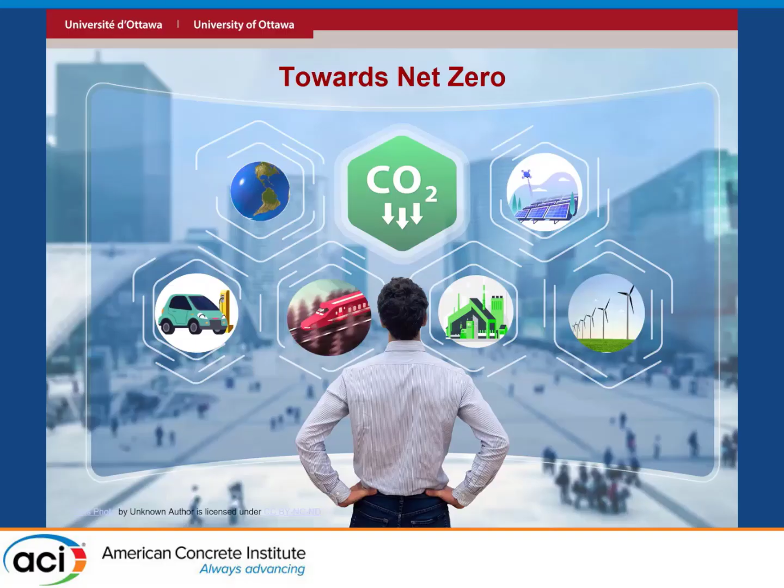So we're going to talk about ASR indeed, but towards the end of the presentation. I think this introduction part is very important, that everybody knows we need to decrease carbon footprint, and we have several different ways of trying to do that. One of the ways is definitely using recycled concrete aggregates.

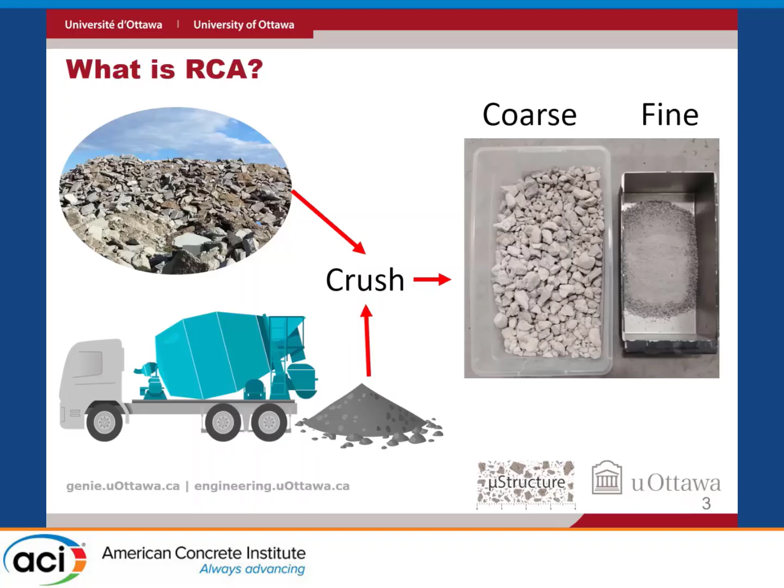So I think whenever we talk about recycled concrete aggregates, we need to be a little bit more thorough and mention whether we are using construction demolition waste or returned concrete. There are completely different types of materials that may be generated out of those. So if we do not distinguish those, it's very difficult to make averages and compare apples to pineapples.

So in Canada, we can use that for structural purposes and for exposed members. There is an annex O, which tells that we need to pay attention on durability features, on the workability and so on.

But based on my past experience and other colleagues doing research in the team, I would say that we have basically two problems with RCA nowadays. First is fresh state—normally mixtures could be super dry, difficult to place, the rheology is not great, and so on. Secondly, and most importantly, is the durability long-term behavior. We are still not sure how that material will perform in the field over the years.

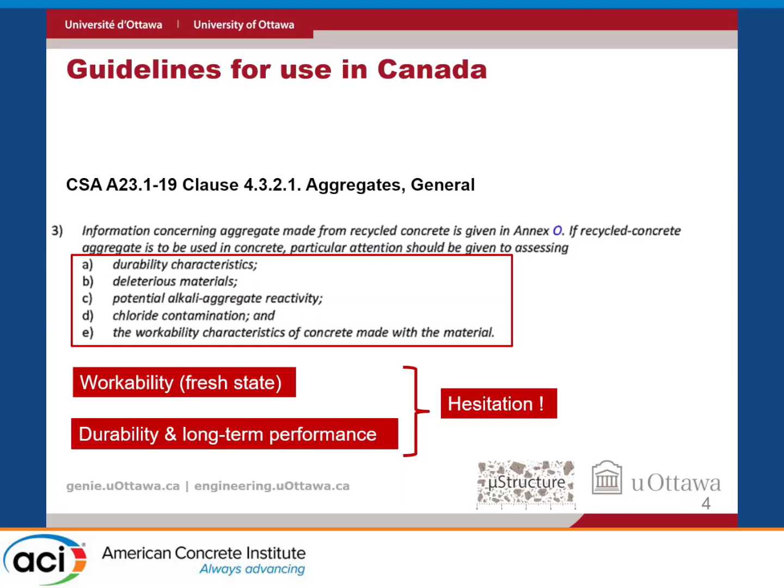Strength is important, as civil engineers we all need, but we can somehow control, especially for conventional strengths. In that perspective, trying to connect that to the presentations that were done before—if you crush a particle, your particle is going to be somewhat like this.

So recycled concrete aggregates are not at all whatsoever like original virgin aggregate. If you want to get the same or similar performance of your recycled concrete aggregate mixture, we need to account for those differences, because otherwise you're going to lose performance.

Of course, this value is very significant. If you have ever tested the residual mortar content value, it may range from 20% to 60% of your particle. So it could be more than half of your particle just mortar. So we're going to have higher porosity, lower specific gravity, higher absorption, and so on.

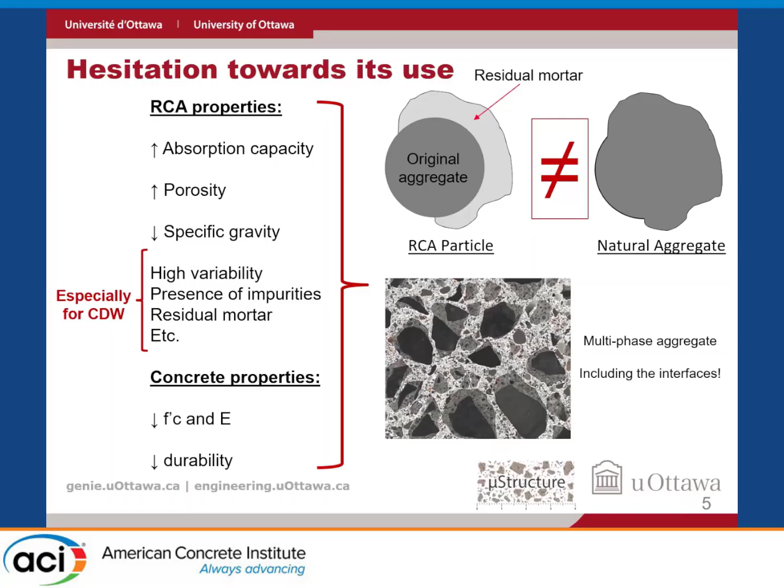So of course, what you're going to do is decrease your compressive strength, your stiffness in general, and your durability. And then what you're going to do is put more cement, trying to come up with all of the things, and then you're going to conclude that it's not really sustainable. Why? Because the mix proportion is not there.

So if you look at the particles, we have cast some concrete with white cement just to really highlight how a particle looks after being completely crushed. And you're going to see that this is very different from the other one.

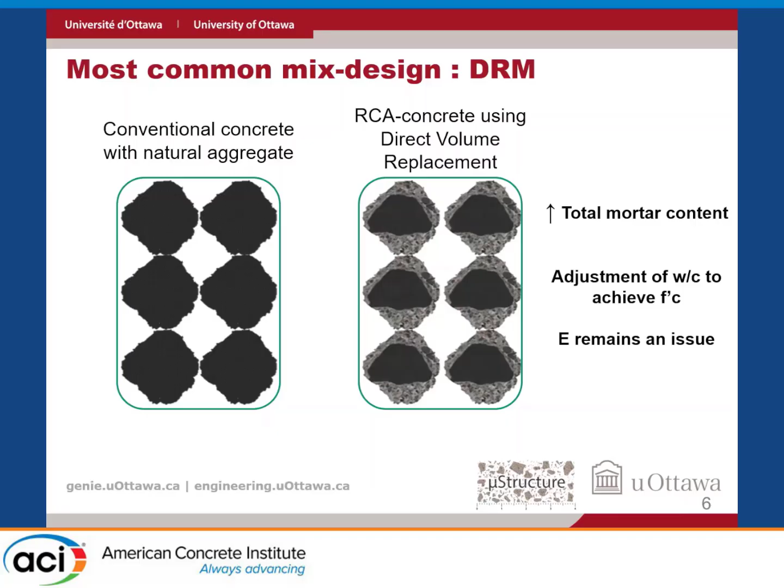So whenever we do proportioning of natural aggregates, you cannot proportion the same way if you're dealing with limestone versus granite versus basalt. All of these features need to get into the mix proportioning. This is the same thing for the RCA.

And this is not new. In the early 2000s, there have been lots of methods developed to try to account for the amount of old mortar in the system.

So if you have a conventional concrete, you would have water, cement, sand, and coarse aggregate. But if you want your recycled mixtures to match the performance of this guy, you need to account for that volumetrically. So two methods of mix proportioning were created in the early 2000s to tackle that.

The first is the equivalent volume method, in which the concept is you match cement paste and you match aggregates. The second one is called EMV, equivalent mortar volume method, in which basically what you do is match the mortar and the coarse aggregates.

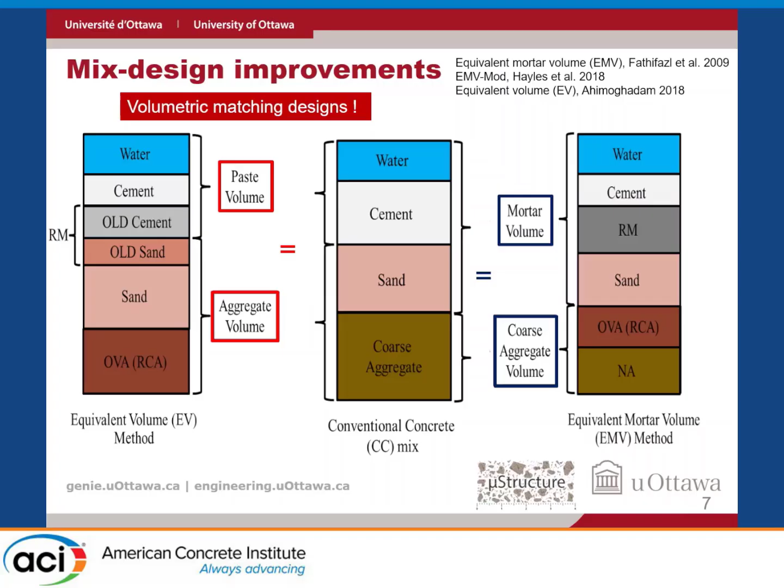And even more recently, people are using particle packing models. So you're going to pack in such a way that your aggregate interlock improves. And aggregate interlocking improvement means improving performance.

And then, of course, since you're measuring the residual mortar content you have in your particles, what you can do is remove cement and replace it with fillers—for instance, limestone fillers or fillers of other kind. And then you keep the amount of cement very low.

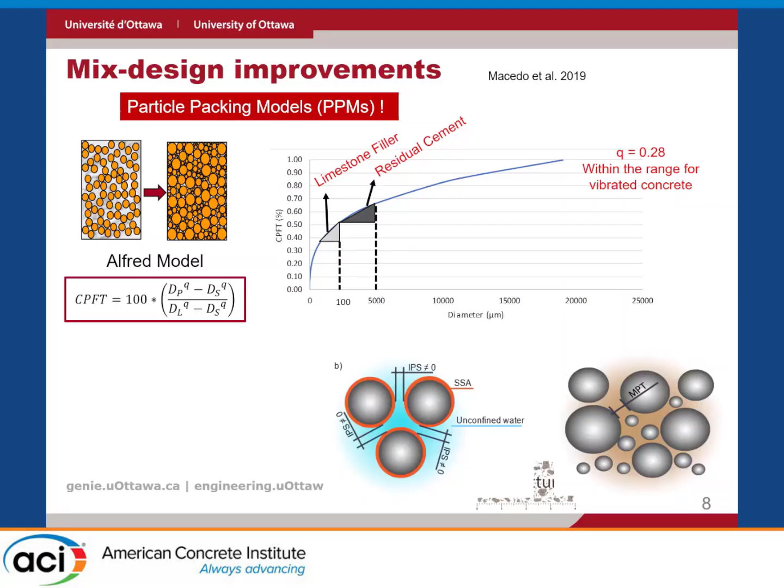And of course, if you are more interested in proportioning techniques, then you can start measuring the distance between the particles so that you ensure you have rheology, which is one of the big problems of the use of RCA.

So this is a published paper that I got with one of my students.

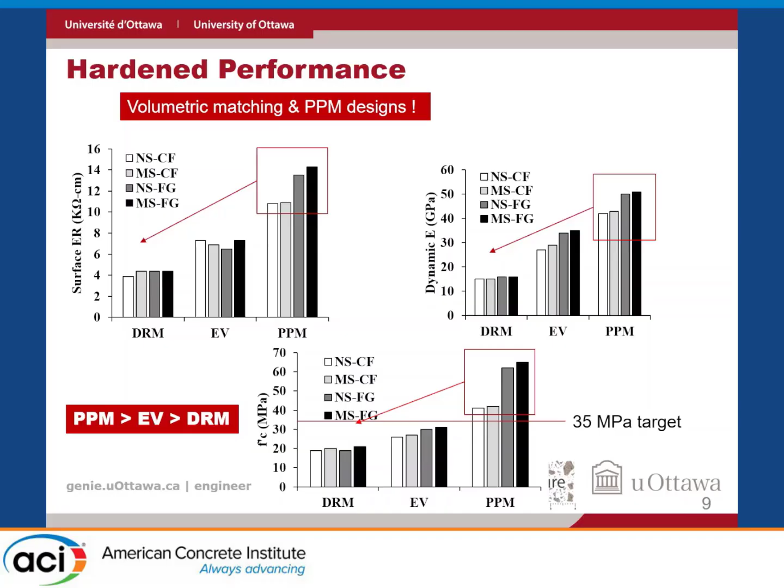So far, people were using the so-called direct replacement method. For electrical resistivity, if you do a particle packing model versus an equivalent volume, for instance, a matching volume versus a direct replacement, you see how you lose performance if you simply take your aggregate and use it as is. Same thing for compressive strength, if you do particle packing compared to matching volumetrically or direct replacement. So definitely, getting your particle recycled aggregate and using it as is is not the way to go.

This is another project I developed with another student in which we have RCA, very deteriorated, with limestone and so on. You can see that with a good proportion we may achieve 60 megapascal with a particle packing model. So again, this can be done. But if you go for direct replacement, you're going to have a huge decrease of strength.

So yes, the quality of the aggregate is very important, but for RCA it's even more complicated, because it's not only the quality of your original virgin aggregate, but actually the coupling of the quality of that original virgin aggregate with the quality of the cement paste attached to it, when compared to the new cement paste you are adding.

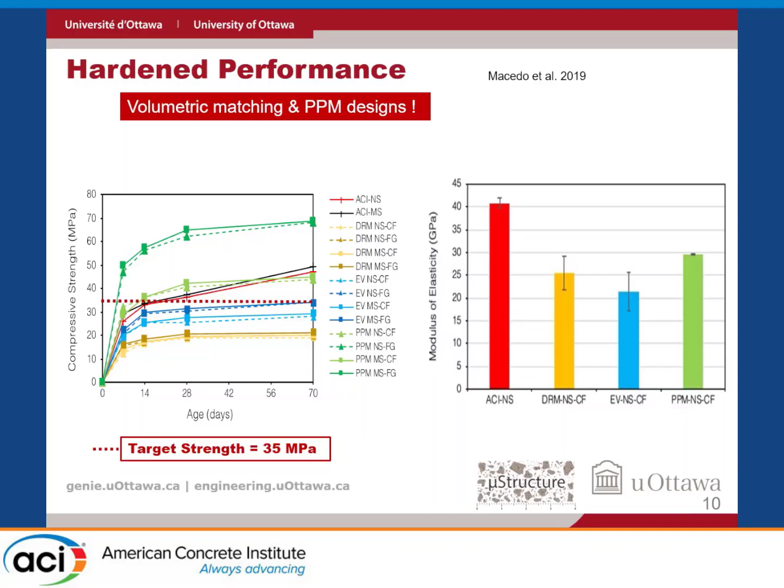Stiffness is also a possibility to keep very good if you account for the residual mortar. So we decided, okay, strength-wise it looks like it works, let's try some durability studies to see whether this concrete could be of interest.

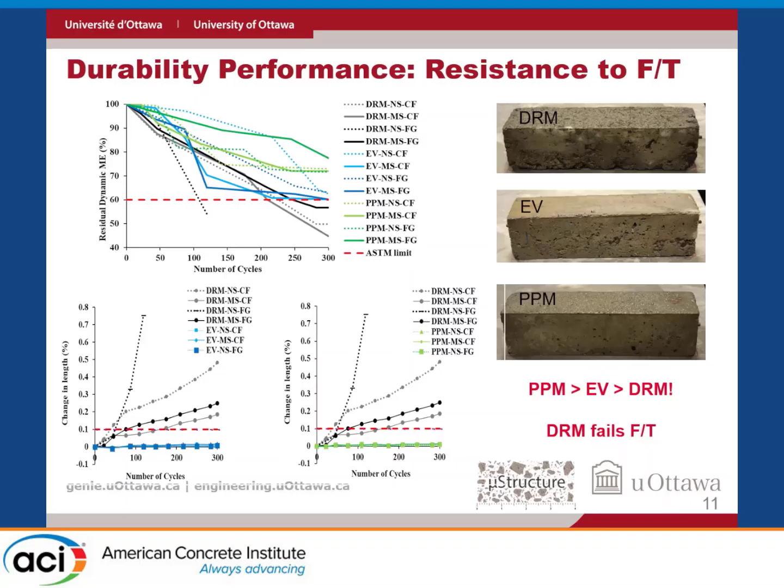But if you proportion it properly, the same concrete with that same aggregate, just taking into account a better proportioning, you can get a good concrete. So the message here is, at some point we need to stop blaming the aggregate we receive. We have an aggregate, yes it's recycled, it presents more cracks, some initial features, yes. But as engineers, we can proportion it properly to make the concrete present good performance.

Now, to cover the topic of my title, I'd like to talk about the coupling of recycled concrete aggregate and the possibility of developing further alkali-silica reaction. As everybody knows, alkali-silica reaction, or alkali-aggregate reaction, is a very important durability-related topic in Canada, the US, and worldwide.

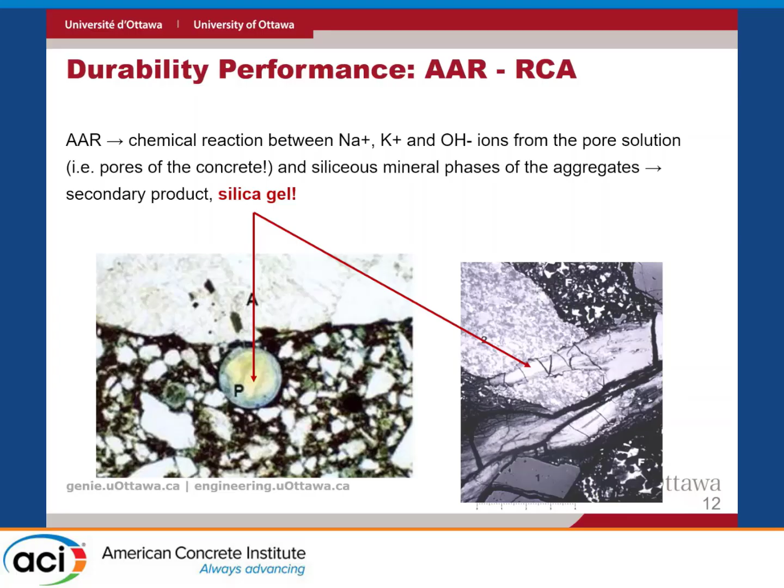Every four years we have a very important conference, which was hosted by us in Ottawa last May. We know that the unstable mineral phases of the aggregates we use, with the cement, develop a gel. The gel itself is not a big issue. The problem is that whenever that gel uptakes water, it induces swelling and deterioration.

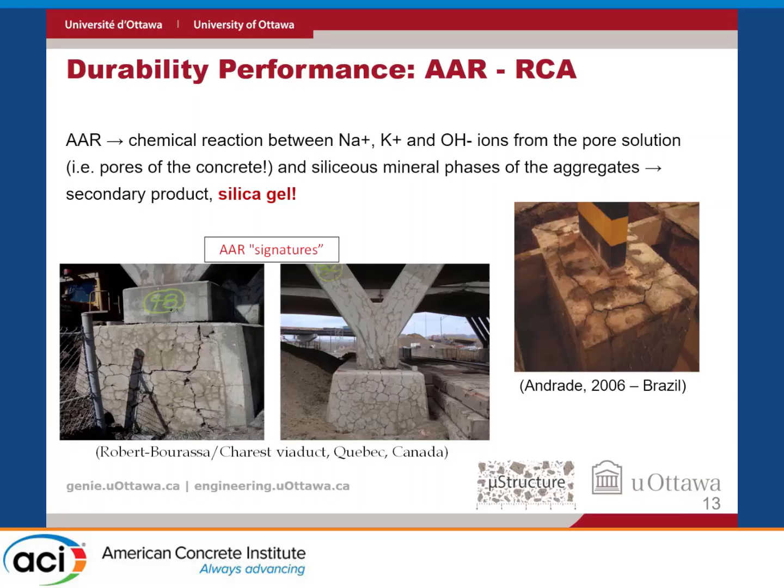So these are some photos of infrastructure in Canada and in Brazil as well, affected by alkali-aggregate reaction. So the question we may have is: what is the durability performance regarding AAR from the perspective of a recycled concrete aggregate?

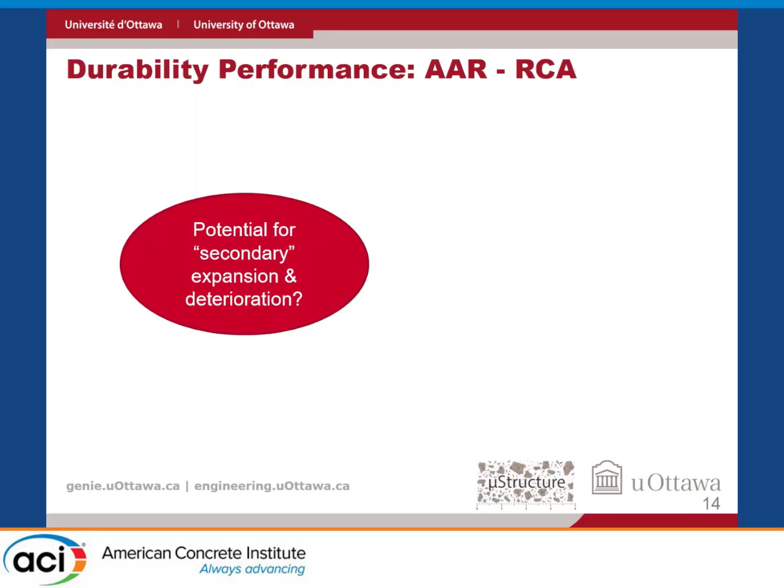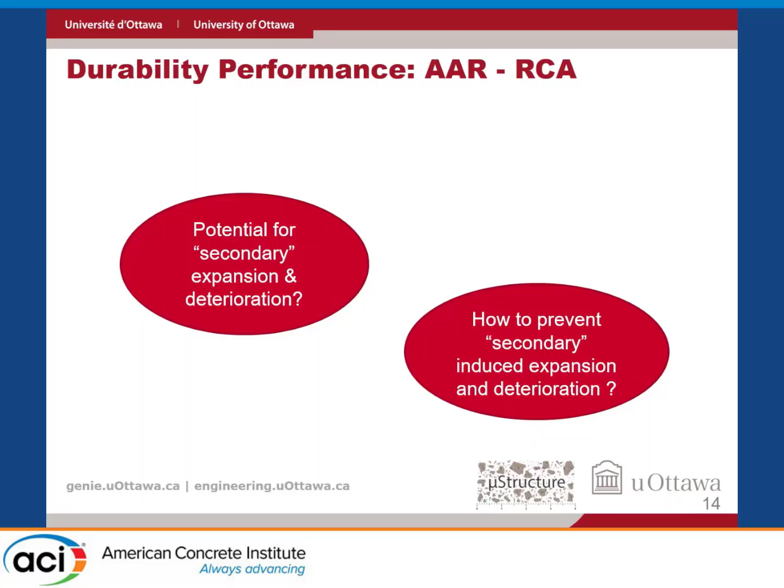Is there any potential for secondary induced expansion, meaning you have a structure that's swollen for many years, now you demolish it, crush it, and reuse it again - what about the deterioration? If it happens to swell again, is the deterioration going to be similar or not? And if there is a possibility of secondary deterioration and expansion, how do we prevent it?

I'll show a couple of results from our past research. This is an overpass called Robert Bourassa Charest in Quebec City, that was demolished after 60 years in service, bearing lots of alkali-aggregate reaction. The amount of expansion was already above and beyond what we would have expected from testing that aggregate in the laboratory.

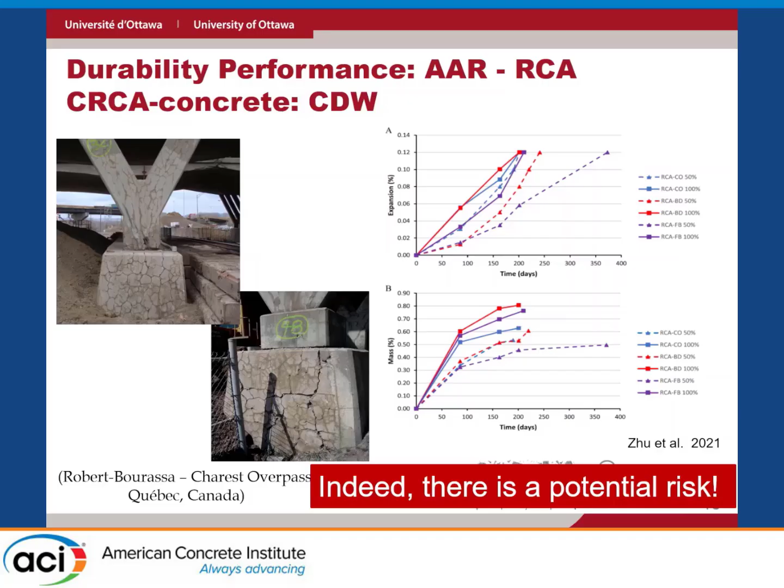Nevertheless, we crushed it and decided to cast some concrete specimens out of it, and we kept having very important expansion. So yes, it looks like there is indeed a very important risk of reusing aggregate as recycled concrete aggregate bearing alkali-aggregate reactive minerals. We need to take this into account whenever we make new concrete - it's not because it has deteriorated a lot that it doesn't have the potential to keep on going.

After those results, I decided to do a more systematic study with other students in which we try to generate what we call returned concrete in the lab and construction demolition waste. What does that mean? It means we get two aggregates that are very reactive: one coarse aggregate from Canada and one sand that is very reactive from the region of Texas here in the US.

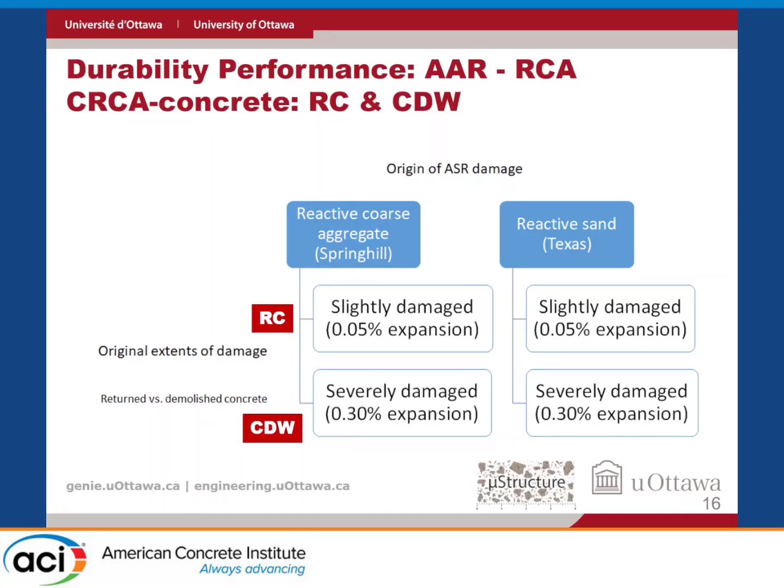Then we slightly deteriorated concrete, which would simulate in quotes a returned concrete, so 0.05% expansion, just slightly cracking. But we also tried to provoke what we would call potentially a construction demolition waste, so we allowed those concrete specimens to swell up to 0.3% expansion, where you can see cracks and even break the concrete if you hit it hard. So it's a very heavy degree of expansion due to AAR.

Basically, the first curve at the top for both plots shows the aggregates in a new concrete. How does that aggregate swell if put in new concrete? You see lots of expansion, 0.3%, even more here, so very extremely reactive aggregates. But if you tackle it, breaking it whenever the initial concrete reached 0.05% expansion or even 0.30%, they both continue swelling.

More or less the same kinetics for the recycled aggregates, slightly different towards the end, but it delays the process using a recycled concrete aggregate with potential for ASR. It delays the process, but indeed we have a problem here.

Same thing for the sand. If we use a sand with already slight reactivity or very high reactivity in concrete, the secondary expansion would be very important. Yes, a little bit delayed over time, but indeed there is a potential risk and we need to account for that.

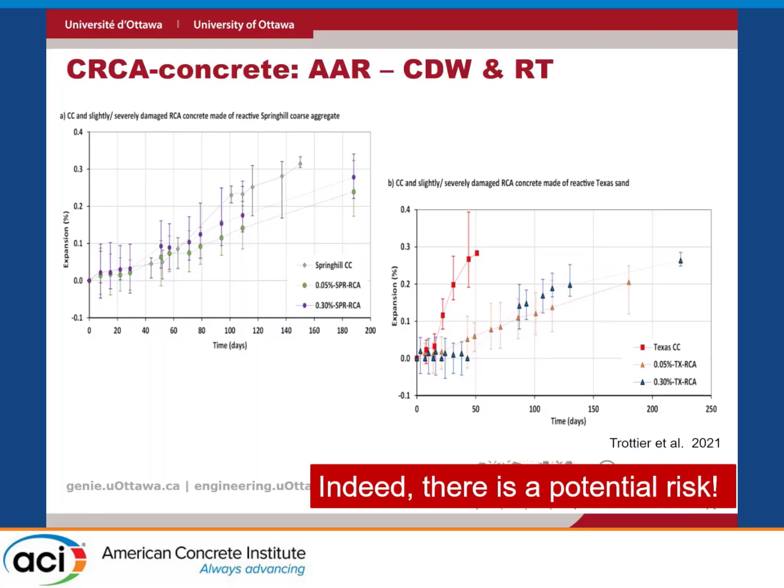One thing which is very important on the serviceability side for us is to check not only for expansion but also for cracks. We tried to plot a curve here: crack density, the number of cracks per square centimeter of the sample, as a function of expansion.

All of them increase over the expansion, which is logical, but in a very different fashion. I don't want to get too much into detail here, but you see the charts are different for the different samples, meaning coarse aggregate with low initial expansion, coarse aggregate with high initial expansion, sand with low and sand with high, and the features of deterioration are different. What does that mean? It means that not only the expansion will be different, but also the deterioration will be different.

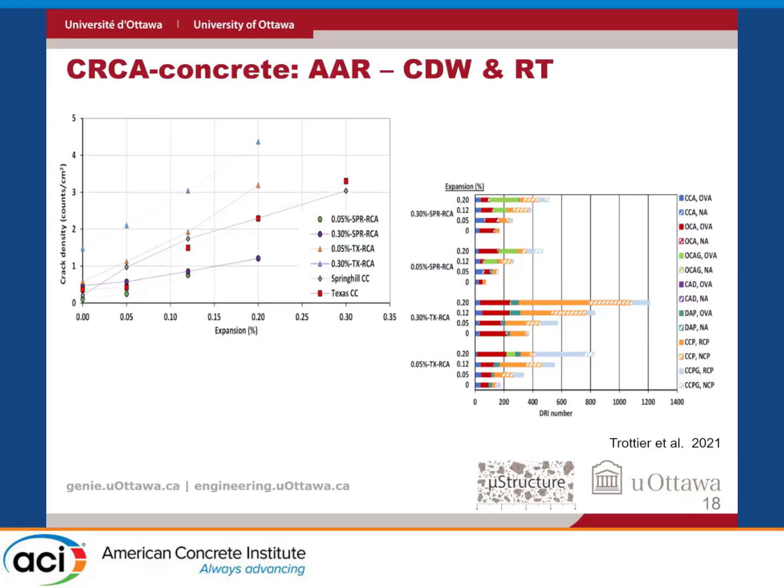But what does that mean? It means that the impact on mechanical properties of the affected RCA because of ASR would also be different. So we need to check those things and be able to measure that, otherwise you're going to be making a huge mistake in reusing that aggregate without paying attention to potential reactivity.

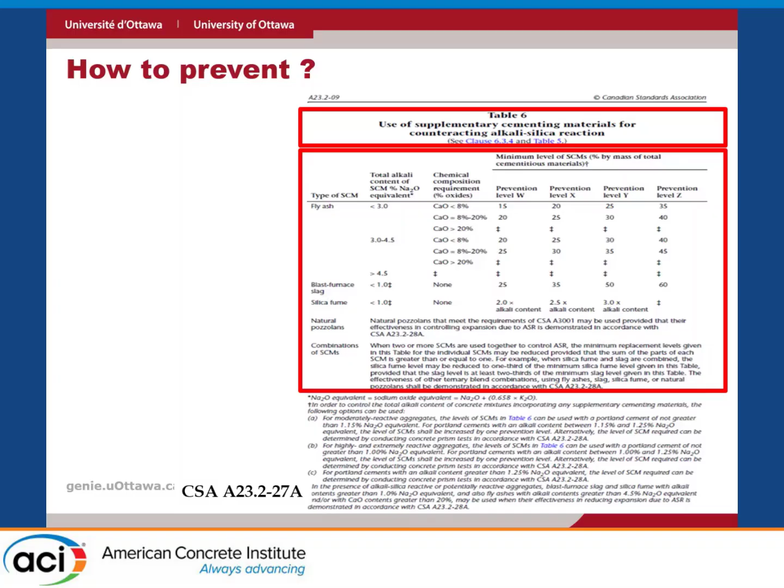So the question that arises right now is the following. In Canada we have A23.2-27A that states we can use given amounts of supplementary cementing materials to tackle aggregates that are very reactive, moderately reactive, or slowly reactive, and we have ASTM C1778 in the US saying more or less the same. But the reality is, can we follow this table for recycled concrete aggregates?

There is very, very little research. Most of the research conducted in the past used C1260, the accelerated mortar bar test, which we know is not really representative. So what we need to do is really tackle research in concrete, accounting for residual mortar and using concrete prism tests to see whether and validate the tables that exist for original virgin aggregates. If we are not doing this, using recycled aggregate with potential reactivity, we are doing it in a very blind fashion and we shouldn't go that way.

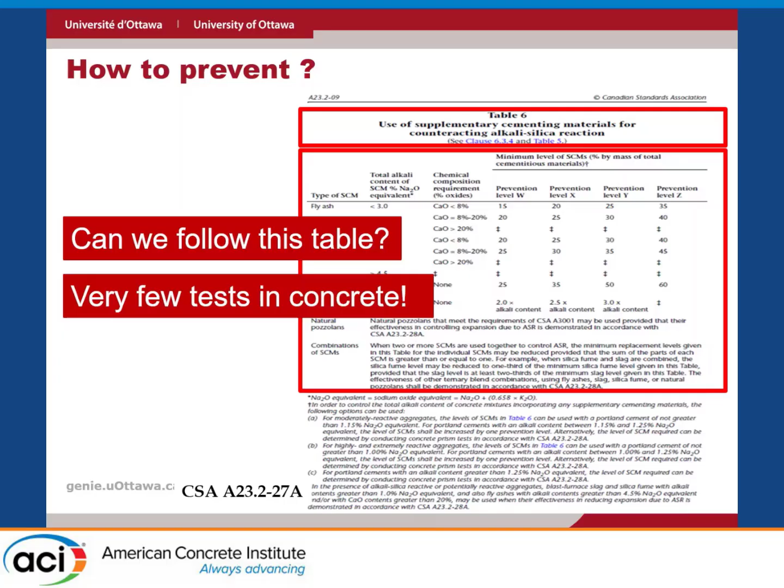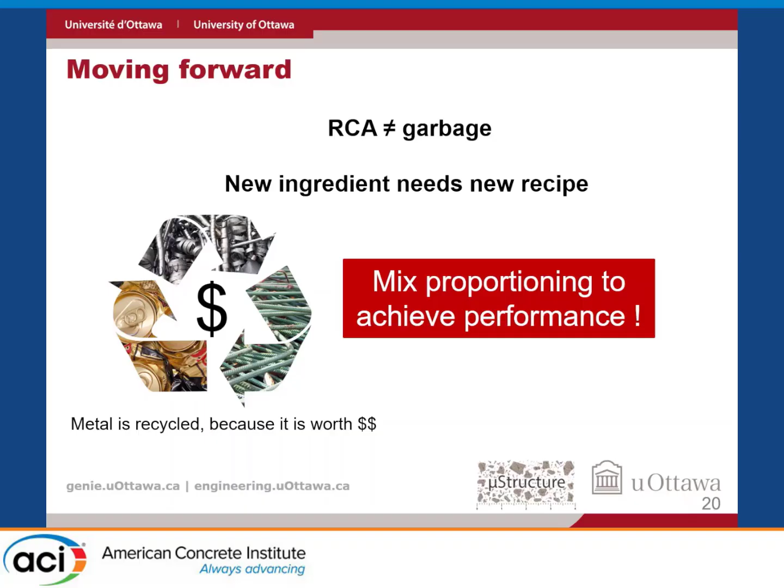So, in conclusion, RCA is definitely different from being garbage. I'm very afraid that sometimes we say, well, the quality of RCA is so low, so I need to increase cement, and because of that it's no longer a sustainable material. I think we, as engineers, are making a mistake in a very important part of the process, which is mix proportioning. Are we doing that properly? Are we taking actions from a mix proportioning perspective?

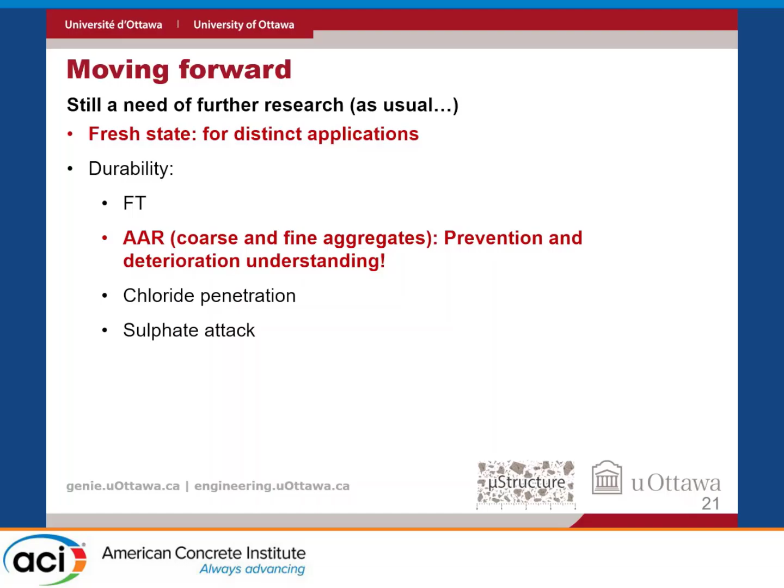Very important research to do in the future: find ways to improve fresh state, and also find ways to prevent alkali-silica reaction, ASR, in recycled concrete aggregates bearing reactive minerals. So with that being said, lots of research are yet to be done. If you have any questions, I will try to take them. Thank you very much.